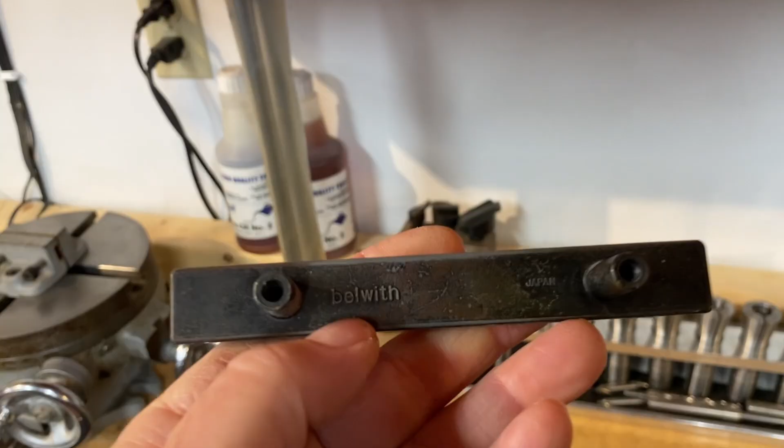These cabinets actually have these handles on them, and they are made in Japan, Belwith, so they've got to be from the 50s I would imagine. It's a nice retro orange color.

Would have looked good on there, but they weren't the original, and so I really wanted it to look and match like my other cabinets. Let me talk a little bit about...

The hinges and how I took those out, how they were removed, and of course the catches, and these, which I should never have pulled out, and where I got the new rubber stoppers from.

These are the pins that were in my cabinets, installed in the house sometime in summer of 1951. They're brass, chrome plated, and they screw in.

And they have a little insert right here that sticks out from the surface of the cabinet, so you can see that. Might be hard to see in the picture here.

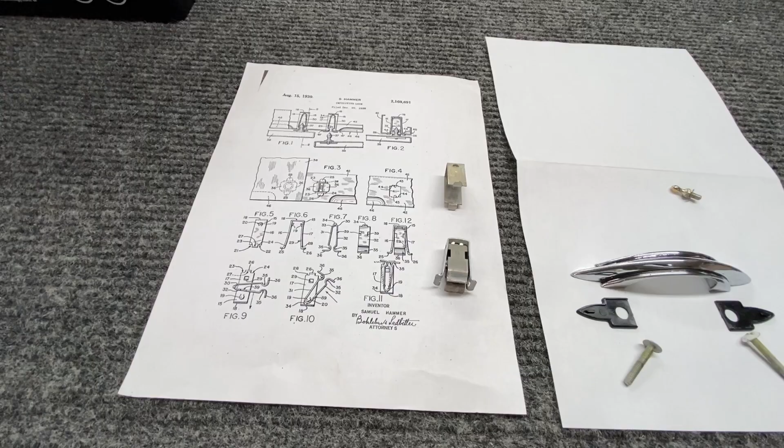So the latches, I was unsuccessful trying to find anything made today that would work. Got lucky though, I had a cabinet I bought on Craigslist that was a different style, and it came with this type of latch that has these little ears on it.

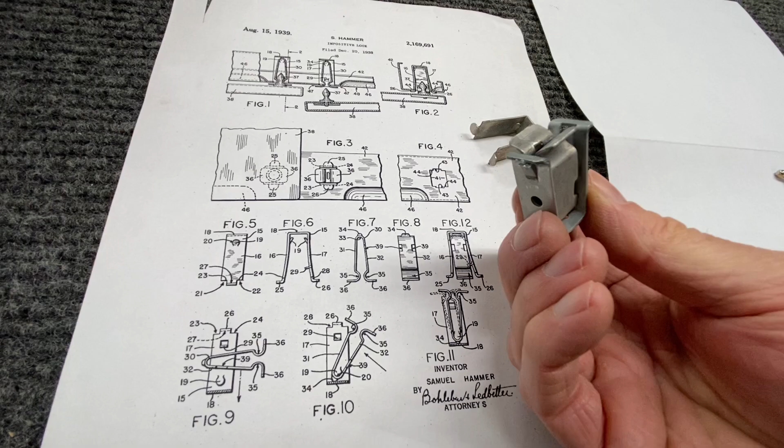And here's the type of latch, or should I say catch, that was in the Youngstown cabinets. On the Youngstown cabinets, I found a patent number right there in the upper right corner from August 15th, 1939.

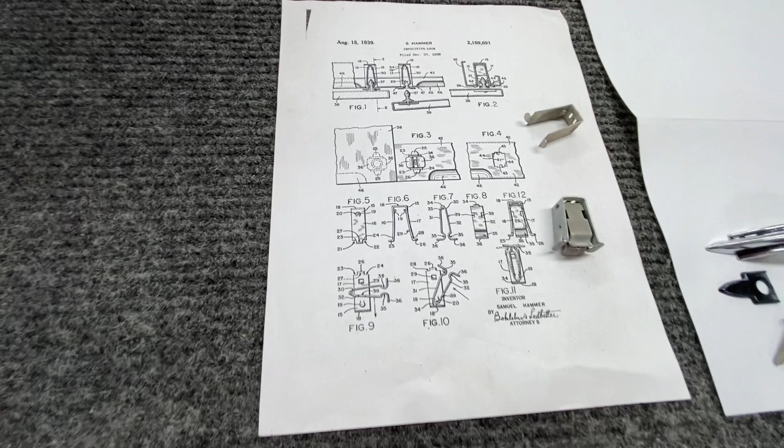I thought maybe if I searched with the patent number, or maybe the impositive lock name, I could find somewhere to get them. I looked on Craigslist, I looked on eBay, I looked on Google, and I couldn't find any.

I'll be showing you how to remove these. I damaged a couple of these badly. If you just pry it out, you'll end up bending that ear a little bit too much, and then it breaks off and won't stay in.

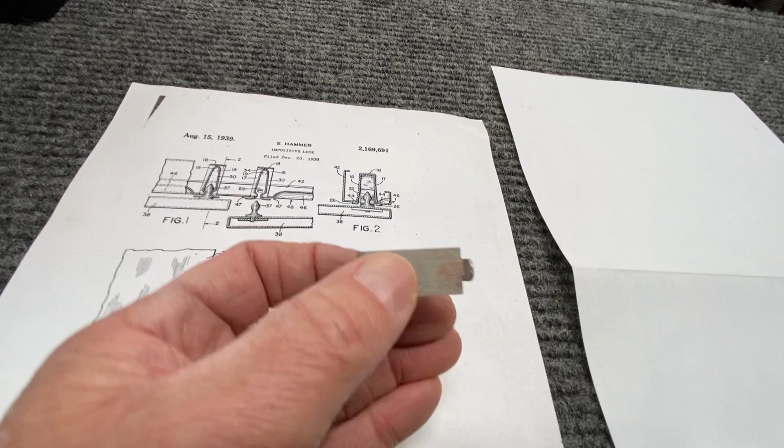This one actually stays in differently. You'll notice that little tab has some space between the tab and this right here.

Here's that other style of cabinet. It's not a Youngstown cabinet, but it has that catch in it. You can see there's no visible base that goes inside, because it's actually hooked on the inside of the frame. Those were a lot easier to get out than the Youngstown ones.

The pins, I found something online, and I'll include a picture. I didn't actually go buy any. Somebody said on a thread that you can get them from Sailrite, but Sailrite doesn't carry 10-24 thread. This is the inside of the door of that cabinet I got off Craigslist in 2017, and it had the other style of pin.

So what I did was I found a 10-24 brass bolt, and I sanded or filed the end of it into a knob, and then I took a 10-24 nut and screwed it all the way on and sanded it down. That now fits and works pretty well.

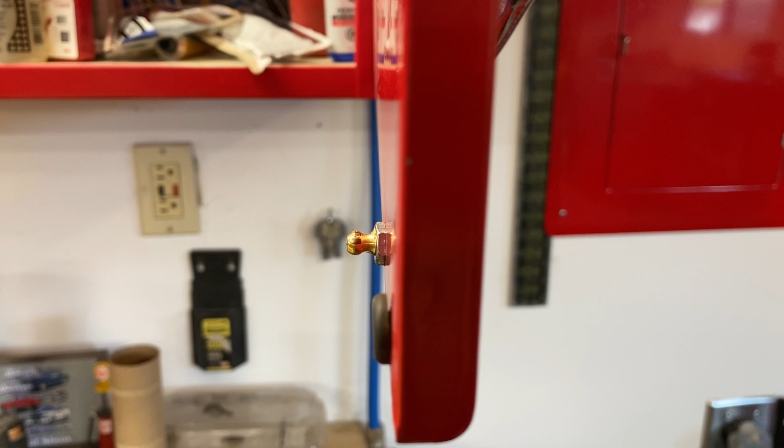There is one more corner cabinet that I got from Tracy down in Oregon, but I'm putting that in the tiny shed. So we just removed these doors here, and the way you take the doors off, there's two straight screws on the top of the door and on the bottom of the door. So we'll take those out.

They're tiny little screws. Of course, they're full of paint. And then the door just pulls off.

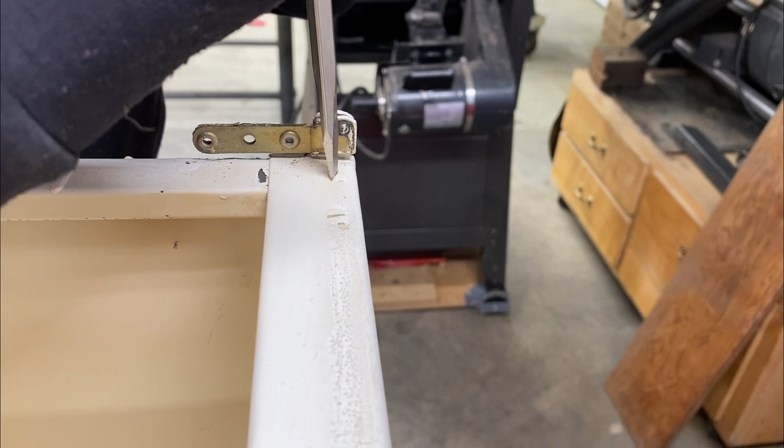And then these two screws come off. The two screws there, they're pretty tight.

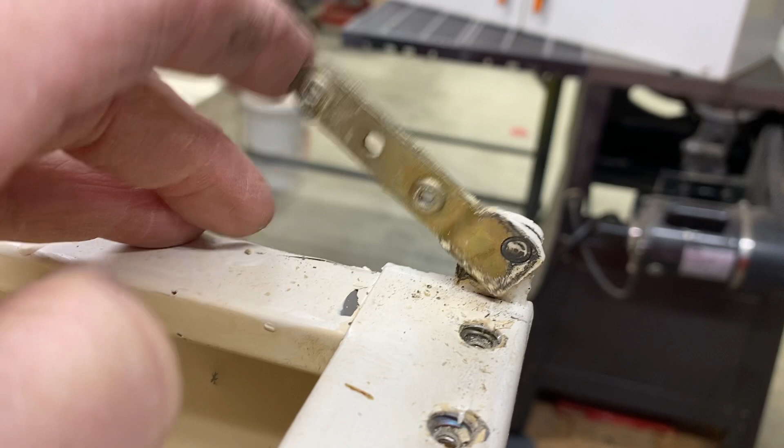And the way the hinge is here is that we don't want to, the hinge pin is like a rivet, it's just mushroomed over. So we're going to flip this up and then put a punch right there and punch those out. They're stuck pretty bad.

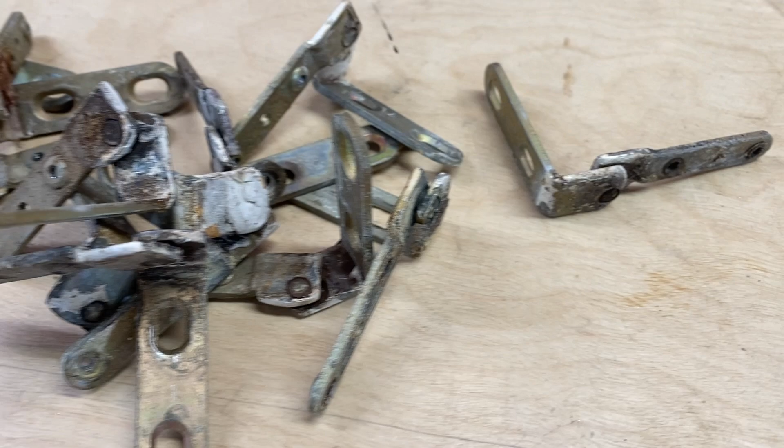We'll ultrasonic clean these screws. We'll spray them down with super clean, and then also the hinges and maybe even the latches to get some of the paint and crap off of them. And just spray them, put them in the ultrasonic cleaner, spray them down with some super clean, and then I always add some warm water.

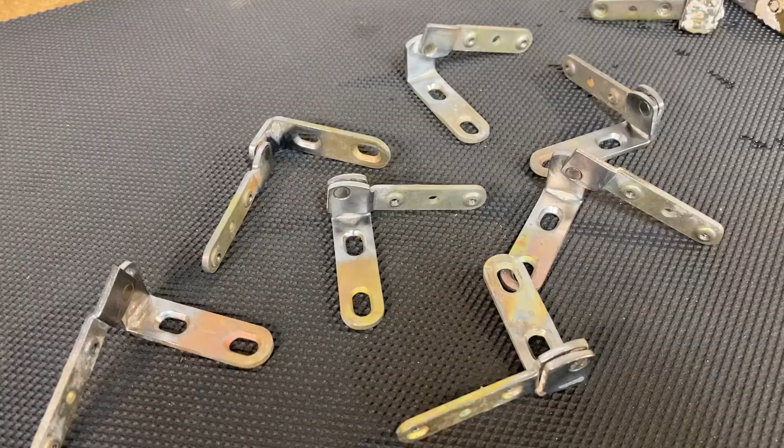So these hinges are all finished. They've been wire wheeled, and first they were ultrasonic cleaned, and then these over here are after the ultrasonic clean but still need to be wire wheeled.

So this is just a quick blast with super clean, and then rubbed it with a scrub brush and wiped off half of it, and it looks a lot better. I think this is going to be it, and they look pretty good. I mean, you can see the shine in those down there.

We were sanding this with just the orbital sander, and I think I'm going to go ahead and tape off the inside and sandblast the outsides of the doors. There's a lot of chipping.

And the paint on the outside is two coats. One is a roller, probably from a long time ago, and then the new one is brushed on. The roller doesn't look bad, it's on the inside of the door only, but the brushed on looks terrible. So obviously I have to go all the way down to the original paint.

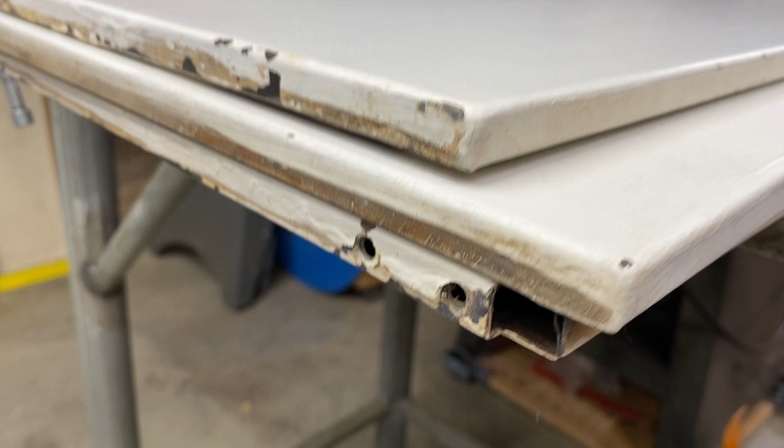And I'm going to tape off any of these holes right here because I don't want a bunch of sand going into the door. There's already some sort of a sheet inside there, like an asbestos sheet or something, and I don't really want a bunch of sand inside there coming out all the time.

So we've got this taped up so that we can put it in the sandblast cabinet and sand it, and I've got the edges taped up on the inside because I'm going to try to not have to paint the inside of the cabinet door. And I put a little piece of tape over that hole there, try to keep a lot of the sand out.

After sandblasting, the blue tape gets a little sticky and gooey on the edge, and I think that's going to screw up the paint. So I went ahead and retaped this door.

But before I started taping this door, I want to take a quick look at this. This is where the pin goes in the hole there, and that's what came out of it. I thought I was going to be able to use this pin from Sailrite, and somebody said this is what works in here, but these are too big.

They just fall into the hole.

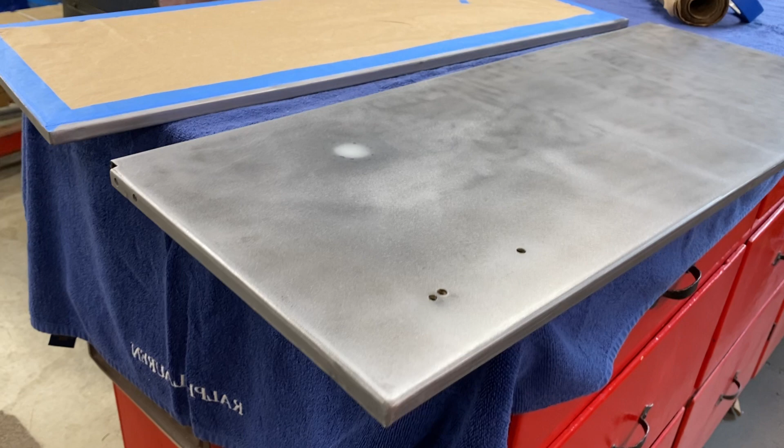And of course there's a few dents, so I'm going to stop now and fix those dents. This door's been sandblasted, then hit with 120 grit, and I found some dents, or at least one dent in this door, so I stopped and filled it with body filler. Then I came back and sanded it with 80 grit to get that skin off the body filler and down pretty far, then that area with 120, and the whole door with 220.

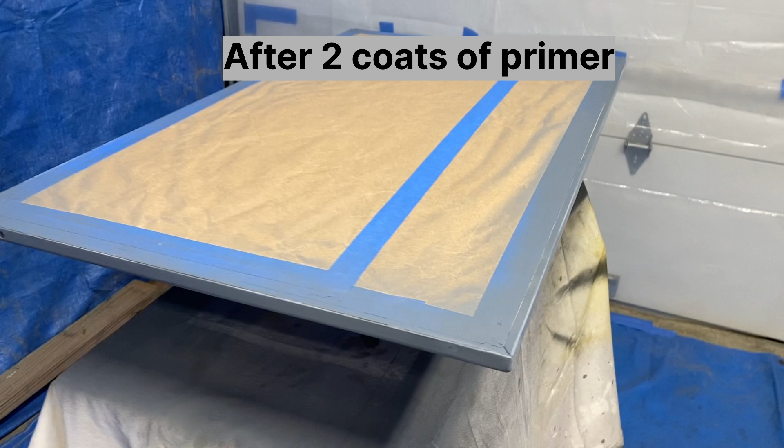I'll start by painting the top coat on the inside of the door. You can see I've got a little bit of white showing through in that crack, from the original door. I'll make sure I get that covered with the banner red, and do the edges and that lip right there, then flip it over and start on the other side.

After I did the 600 wet sand, I did a quick gray Scotch-Brite, and now it's time to clean it with Sprayway glass cleaner. I'll do that on the front and the back, and then I won't touch it anymore, and it's time for top coat.

Okay, we're going to take out this latch. You lift up one side and push in the pin. So we'll lift up this side. Then you take a punch—let's see if I can get down here. See that? Okay, punch that flat, and you push that side back down. Then this side should come out. That's it.

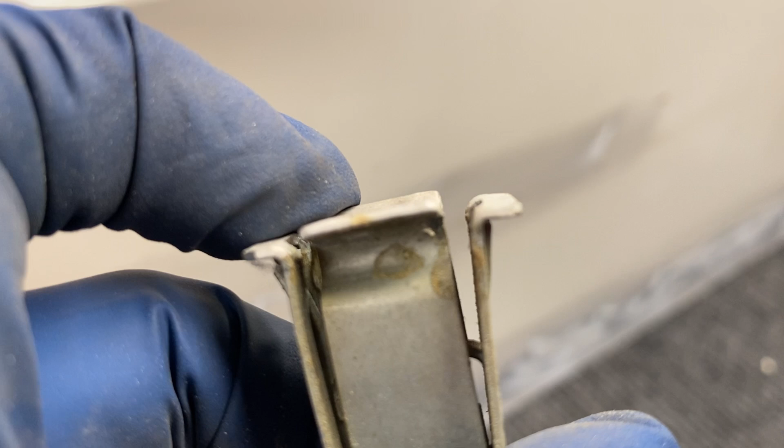And then after you're done, you need to bend the tab. That tab is bent out, and that one just needs to be bent out a little bit, and then you can reinstall it.

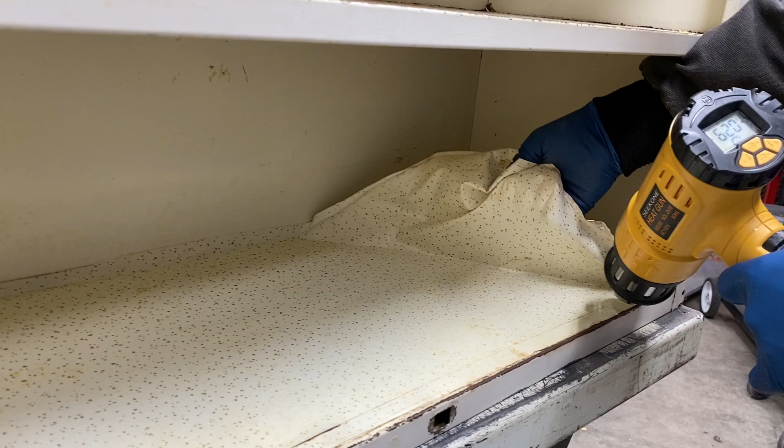This contact paper is going to come off, and I'm going to try a heat gun and see if that works. So the heat gun works out to help release the contact paper. I don't think it takes the adhesive off, but it sure helps with pulling this off. I'm going to try it without the heat gun and see if it takes the adhesive off when I'm pulling it.

So we thought we'd clean the tops of the cabinets, and then of course there's a lot that are rusty, and this one is rusty and bashed in. It's probably the worst one—it's bashed in. And the next worst one, that's on the front unfortunately, but we'll get that straightened out.

This cabinet looks pretty straight, just need to clean that one. This one looks fairly straight, but it's really rusty, so I have to decide whether we're going to sandblast the top of that or just sand it. One good thing about the top of the cabinets is you don't really see them, so they don't have to be super nice. All right, we straightened out this top edge here, kind of sight down that.

Well, the biggest cabinet, I decided I was going to go ahead and sandblast the inside. There was a lot of rust, and I got quite a bit of it out, not all of it. Now I'm going to orbital sand it with 80 grit, maybe 120. Before I did all that, I cleaned it inside and out with super clean—it was really nasty, really opaque. I think there was a lot of decades of cigarette smoke on it. So I'll sand it all down, prime it, and then we'll look into doing the Dover white.

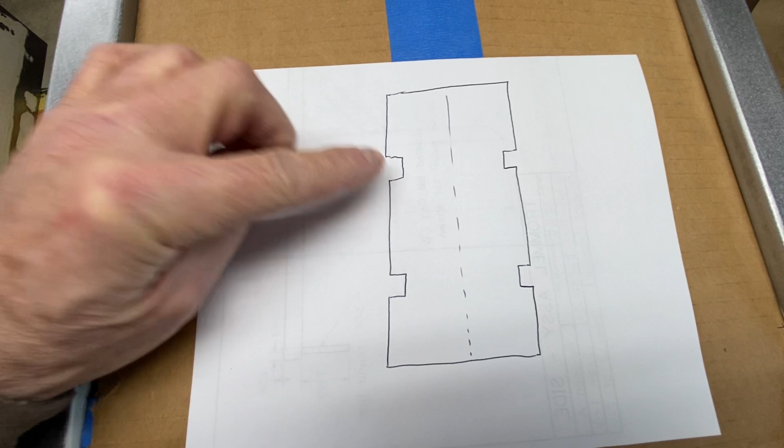The insides of these cabinets won't get painted, so the only masking I do is at each shelf, and then I put a piece of kraft paper around the end, and wherever there's a hole that goes all the way through the cabinet, I tape those off. Here's one on the side that I had to tape off. Then I put some cardboard over the shelves, just tuck it in, and it looks like this. It's got little cutouts on each side, and I tape the center after I put each side in. It masks it pretty well, but in the corners on the ends there's a little bit of a gap, which is why there's kraft paper there.

This side of the cabinet won't be seen, so I sand it, and any bare areas I prime, then wet sand the primer, and Scotch-Brite before I put a top coat on. On the inside, I do the exact same thing. Here's what it looks like with the Krylon Dover white done, and then I'm painting the outside of the cabinet here, turning it in my makeshift paint booth, and what it looks like when the box is all finished.

So replacing the bumpers, the ones on the left with the ones on the right, I got them at the local hardware store, and the bin said they were automotive but didn't say which automotive brand. They fit pretty well in the hole right there, same height, almost the same diameter. But one of the problems I'm having is these pins need to go back into this hole right here, and they were just kept in with a piece of wire. When I went to straighten the wire out, it snapped off, so I need to anneal them.

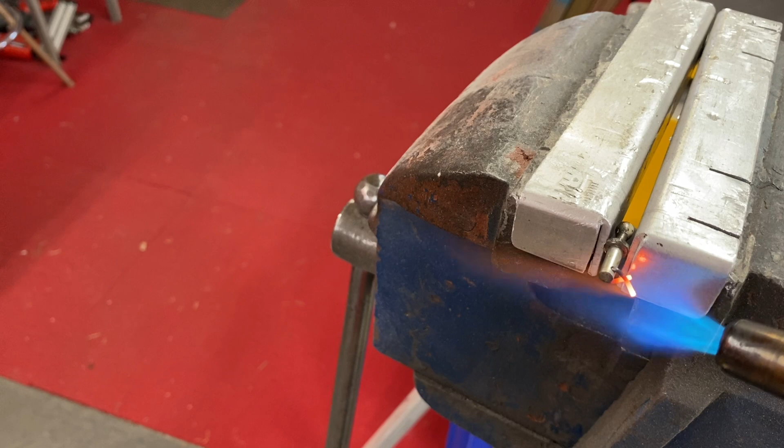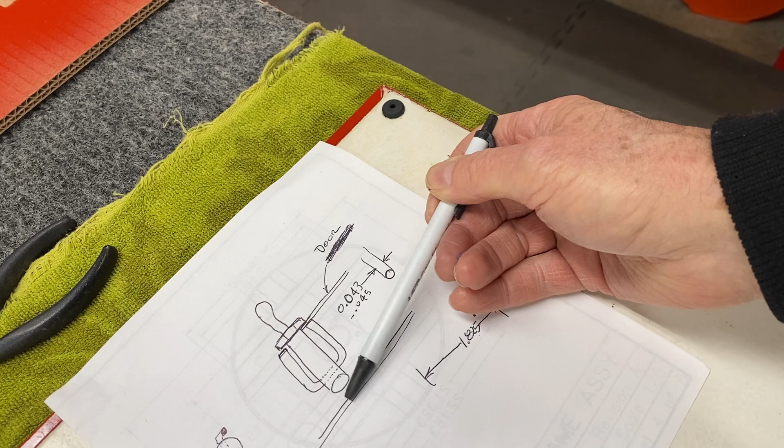All right, let that cool. That should anneal it, and I'll see if I can straighten it and get lucky. I tried to install one of these off camera, but it wasn't going in. These legs weren't engaging, so I could just pull it straight out. But I measured the depth of the door, and it's like 0.517, and the pin is 0.043, so there's plenty of room between the pin and the inside of the outside skin of the door. I ground off the ends of the wires a little bit, so there's a little room now between the flange and the end of the wires, and we'll try installing those.

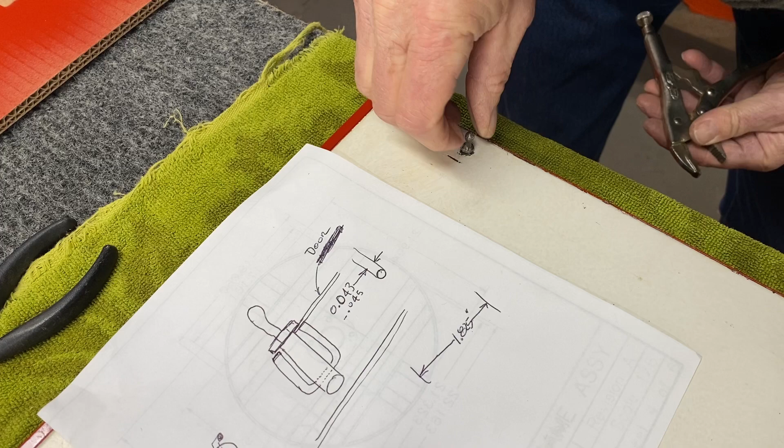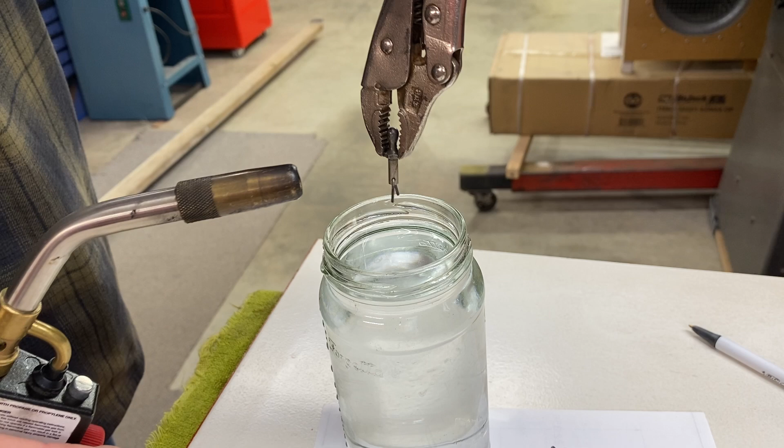Still not engaging. Well, that didn't work, so now I'm going to splay the legs open a little bit more on this one, and it's 0.3. Oh, I think I'm going to heat treat these first before I install them. So I'm going to heat it and then quench it. When I twist the legs up, each leg individually, it touches the bottom of that hex, so I'm hoping they'll spring open when it goes in.

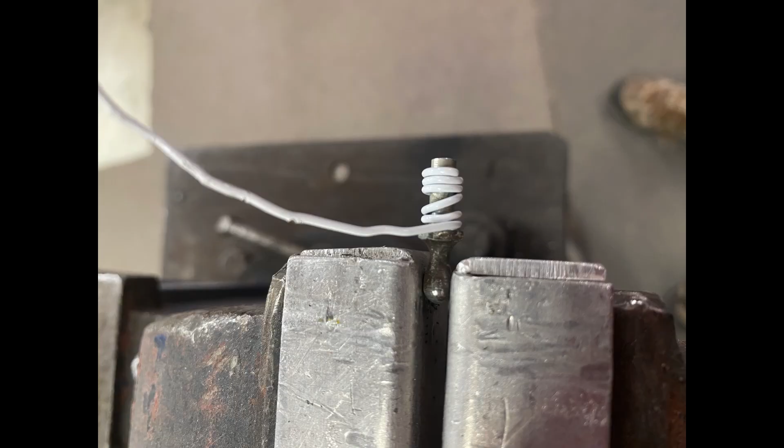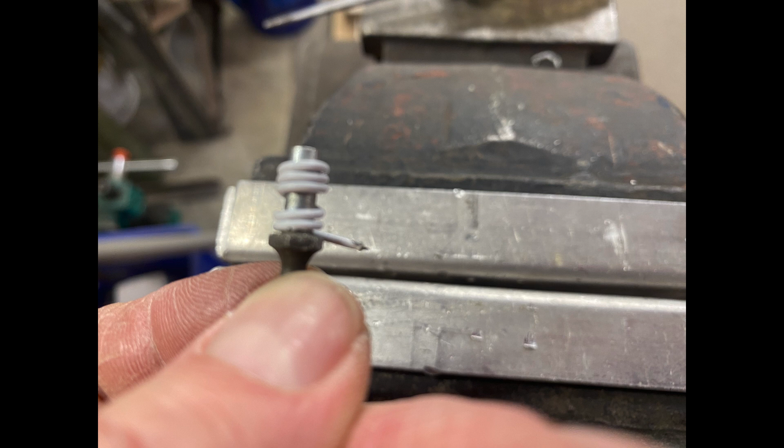I finally gave up, but I found that their wire pieces were the same diameter as a standard paperclip. So I straightened out a paperclip, poked it through the hole at the end of the pin, and wrapped it around. I left a little gap, thinking that maybe it would be kind of springy once the paperclip was threaded into the hole. Here's one that's completely finished with a paperclip in the background there.

Let's give this a try now. Got to get the wire to start in the hole. So it's started now. You can see that looks pretty good. Okay, it's all the way in. Oh, not quite actually. There we go, I heard it click in. Boy, that's really tight. That's gonna work.

All right, I got all the hardware on. They look pretty good, not fantastic, but good enough for the shop.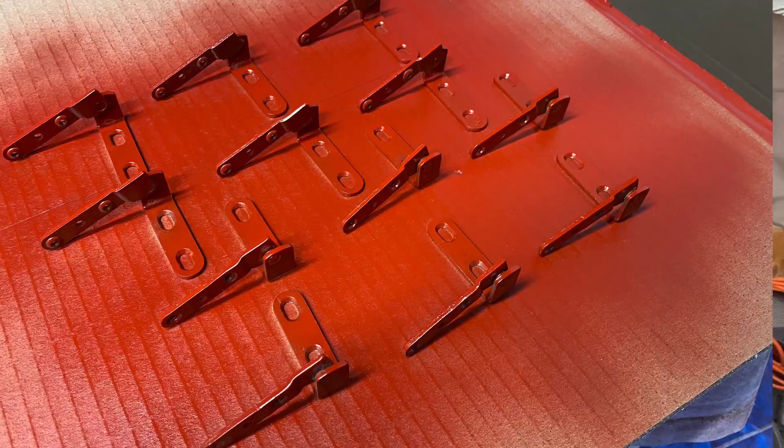Next job is to put the hinges and the other catch piece on the boxes.

Well, it's almost done, I just need to put 2 more doors on. It's just looking so good, I thought I'd show you how they came out. Pretty nice. I mean, there's some problems, but for shop cabinets, they're great. And they match those.